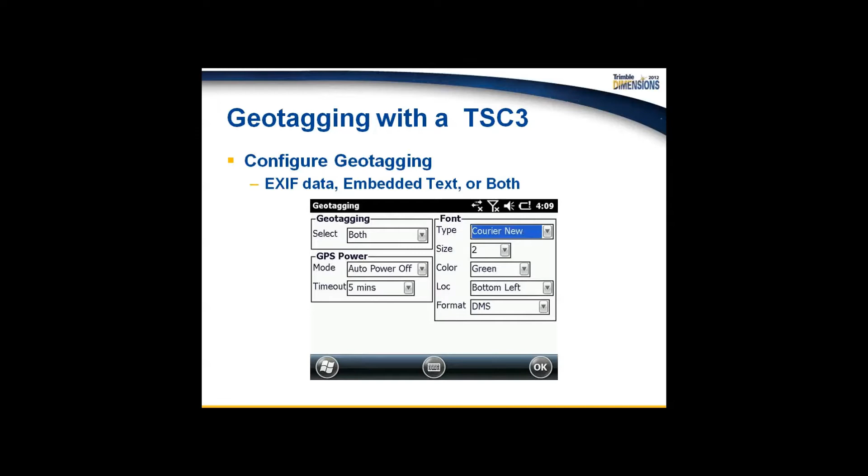We hit that twice to store that image, and now we can choose to do what we want to do with it, much like you saw on the previous screen where we can geotag. We can attach it to a feature based on the setting we have in Trimble Access, whether it's the next available point that we take or the previous point that was shot. And if we geotag, you can see you can put some EXIF data, embedded text, or both with that image as well.

So a couple of things about how these images are stored. As described in the previous slide, you can see the controller can embed the controller position onto that image. However, if you're using Trimble Access and not the embedded geotag function in Windows, you can embed the measured position that was measured with your GPS to that particular image using the geotag function setting within Trimble Access.

So as a review on that, the TSC3 that many people are now running with Trimble Access, you can use that for geotagging, which we already talked about. Obviously, you can use the internal GPS for navigating, and then also if you're using a robotic total station, the integrated GPS search within Trimble Access can be used with the TSC3.

Also, with the introduction of Trimble Access with the TSC3, they introduced this compass. So keep in mind, if you're using a TSC3 with Trimble Access, you can turn on the compass. You'll notice in the upper left window that the compass has been enabled. You can see the north arrow has got a couple of dashes around it to indicate to the user that the north arrow is being generated and displayed using the compass embedded in Trimble Access software.

And the picture on the right, the compass has been disabled. The north arrow is just a standard north arrow. And you can see here on this screen, you can configure that under the Options key in the stakeout menu.

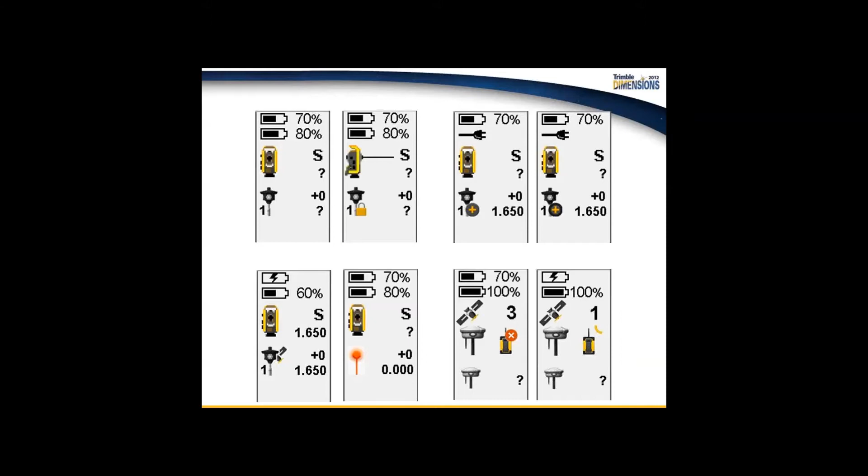Okay, and then in September 2011, Trimble introduced Trimble Access 2011.1. So with that update, they introduced the land seismic option. Most people aren't using this SDK option, but it is an option here. I just wanted to bring up a slide on what it does. Basically, this particular land seismic option allows you to work in a seismic grid stakeout routine. It works within the Trimble Access jobs. It uses the same jobs, but it also allows you to bring in other jobs from GP Seismic software for grid-based navigation, for exclusion zones, for calculating offsets with these TPL files.

So GP Seismic Office has a direct integration with land seismics. So if you're doing any seismic work, that integration is built into Trimble Access with this module. And notice a note here that this land seismic module is an excellent example of how the Trimble SDK works. Certainly look for more SDKs to be introduced in 2013. There will be one introduced from Frontier Precision in January of 2013 on a land surveying geodetic module that you'll see here in the next 30 days or so.

Okay, moving on to 2012, or this past year, Trimble introduced Access version 2012.1. Some of those enhancements were, I would say, pretty major. Panorama was added to the Trimble Vision instruments, so the panorama feature that you have for the Trimble VX was also added for the Trimble S6 with Vision. You'll notice you have this new volumes and surfaces tool. You have the integrated interrupted target measurement, which I'll also talk about, the OmniSTAR, as well as how some of the stakeout display orientations are changed. The reason I'm going into a couple of these, like stakeout display and volumes, is these are things that a lot of you that have attended our user group meetings in the past have asked for.

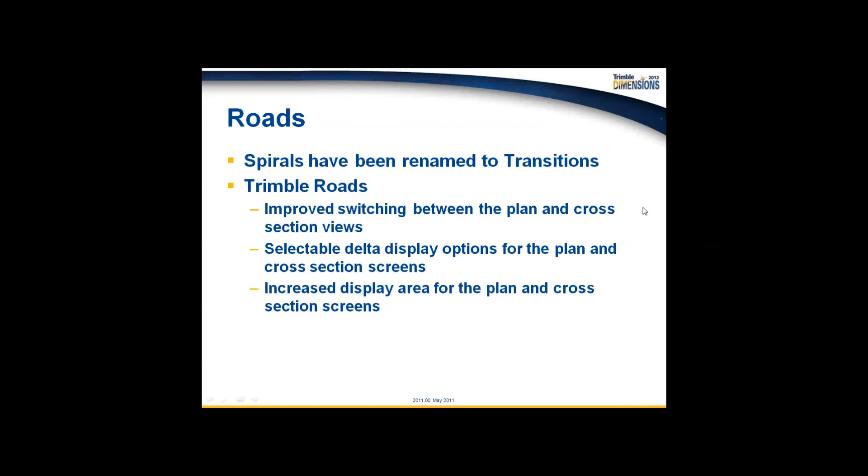So a calculated construction offset now can be applied when you stake a Trimble road by station offset. Previously, this option was only available when you're staking nearest offset, which a lot of people did not use. So now you can use a calculated construction offset. Basically, this means you don't have to change the earlier defined construction offset if you encounter some kind of obstruction and need to move your offset based on that obstruction.

Anybody that's using GENIO Roads, one thing that they did change here is the graphical stakeout selection improvement; the GPS position is now displayed there, so you can see that as you're staking a GENIO road. And then also if you're staking a GENIO road in a conventional survey, the instrument position, backsight, and instrument are now displayed. Construction offsets for the 5D string now appear as well in the stakeout plan and cross-section views.

Here's a big one for Trimble Roads, this is 2012.1 of Trimble Access. Now when you're keying in a template and you want to use that in another road possibly, you can now copy that template from one road to another so you don't have to duplicate that process. This is a huge improvement, something we've had customers asking for a little while. Again, based on what I've seen customers looking for, this is a very big key feature with Trimble Access.

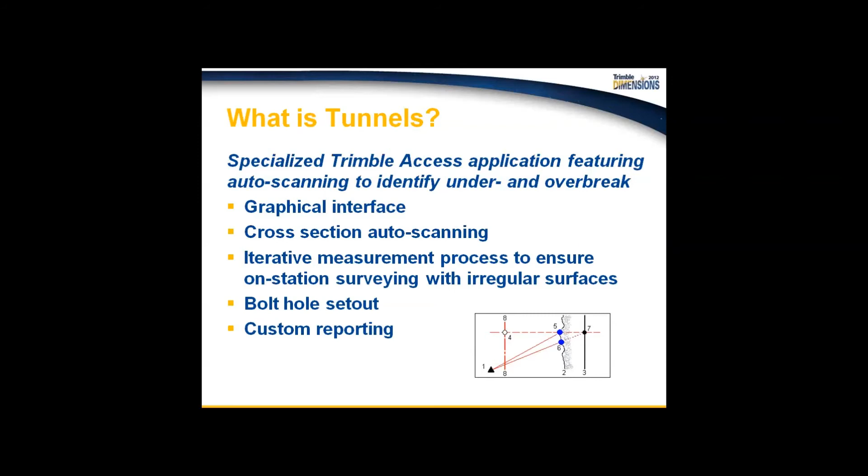All right, moving on to tunnels. What are tunnels? Again, it's a specialized Trimble SDK application featuring an auto scanning feature with a total station and the ability to identify under and over breaks. So you can see here in this image, you've got a graphical interface, a cross-section auto scanning routine with tunneling, a measurement process to ensure on-station surveying with irregular surfaces, as well as bolt hole set out and custom reporting for the tunnel application.

Another SDK is the mining SDK, which is more of an underground mining feature, by the way, not an above ground mining feature. It streamlines your workflow for a drill rig type of development for your drive set out. It allows you to easily select matching pairs of points for your laser lines, your pivot positions, and your blast holes, as well as automated stakeout for center line, grade, and laser lines. And lastly, you can stake out the blast hole collars and your drill rig pivot positions for these underground applications.

Another SDK is monitoring. We've talked about this a little bit with our customers, and some of them are actually using this monitoring application. It's just, again, streamlining from a regular survey into more of a monitoring survey. And some of you actually probably use your regular general survey for some type of monitoring. Well, this actually contains a different file, this MJOB, and this MOBS file, this observation file, which contains station setup, backsight information, and then all your measured observations for more of an automatic or manual pointing type of monitoring.

It'll allow you to see alerts if you're out of tolerance, rather than you take it back to the office and find out later that this monitoring setup was out of tolerance. You can find out right there while you're on the site. And you can do a tolerance test. And then as well, you can get this custom report, which allows you to see graphical scatter plots and any tolerance data in regards to the monitoring prisms or GPS positions that you're measuring.

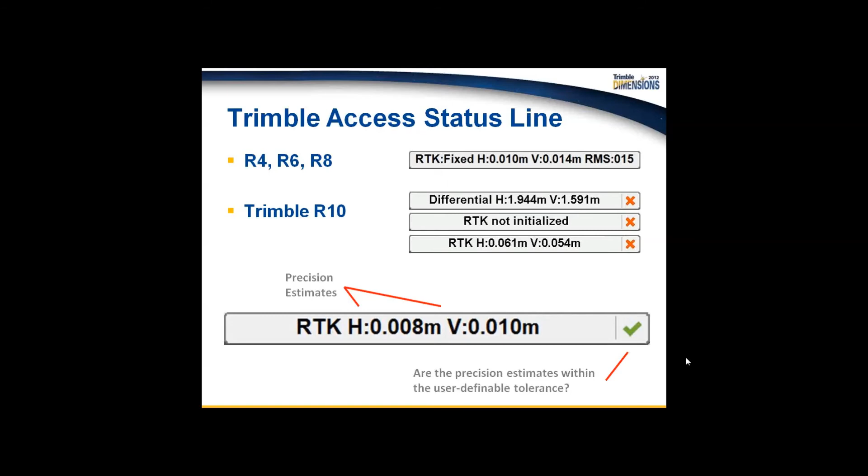A note, by the way, you see at the bottom of this screen, older receivers still use a fixed float mode. Okay, R10 is the only one that does this. So this is what you would see if you're using an R series receiver, R4, R6, R8, 5800. You see a fixed indicator, a precision horizontally and vertically, and RMS. This is what you're going to see with an R10. In this particular case, you're going to see if it's in differential, if the RTK is not initialized, and then you're going to see a precision-based measurement if it's outside of tolerance or inside of tolerance, either with an X, meaning you're outside, or a green checkbox, saying you're within the tolerance that you set. You can start measuring.

Another technology is SurePoint, which allows you to use the tilt sensors on the R10. Those tilt sensors essentially give you measurement automation, increased accuracy with tilt warnings, and a tilt distance that you can review. You can actually map it, report it in TBC, and even graph it in the QC graph, which is pretty cool.

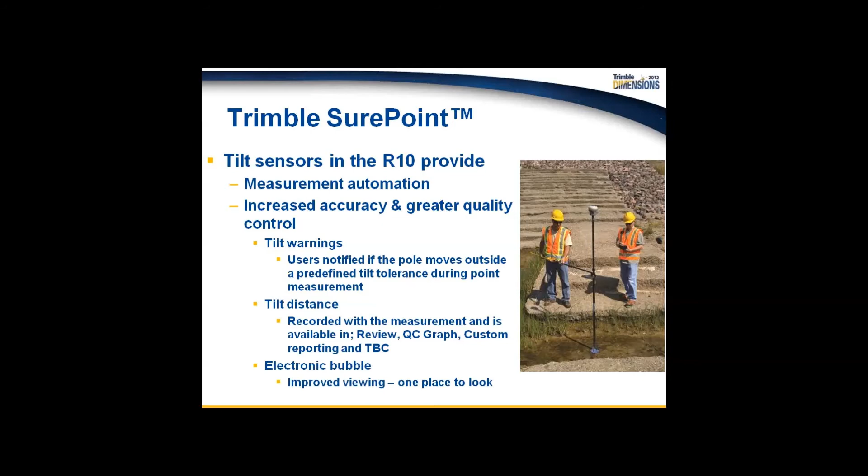And then lastly, this cool little electronic bubble, called the E-bubble, of course. I'll show you that as well. It enables clearer, easier, more accessible measurement views in regards to leveling during measuring. Coupled with the tilt auto measure, the E-bubble allows you to measure points automatically when the pole is within tolerance, and I'll show you a little video of that.

You can see from this image what the electronic bubble would look like. You can see it any time on the TSC3 with the Control L key when using an R10. That'll allow you to show or hide the E-bubble for any screen you're in. You don't even have to be in a measuring screen, you can see it anywhere. Topo and rapid point measurement support this E-bubble, and it's configurable how well or if you want the tilt auto measure to be used, and also the tolerance.

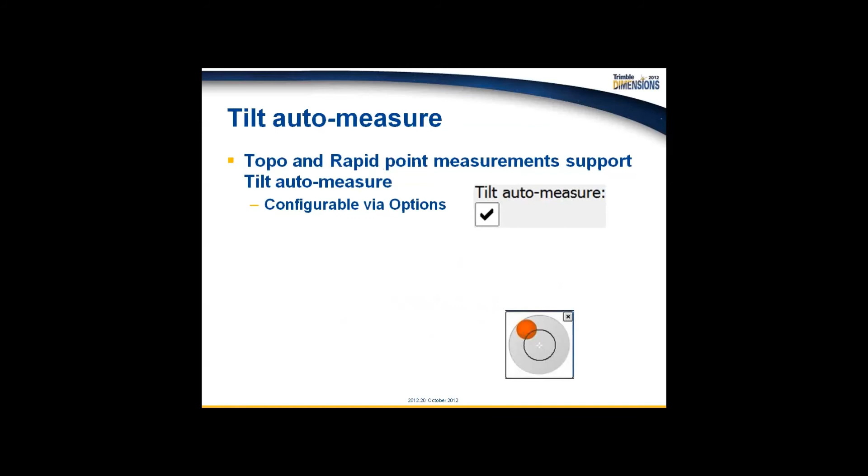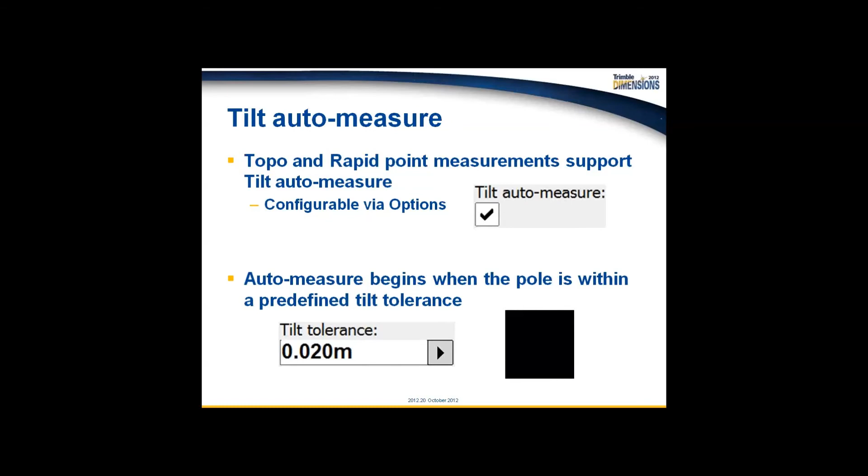Let's go back to that screen here. You'll notice a little video on the bottom. It's just going to show you how that tilt auto bubble kind of works. So you can see that here. As I level up, it goes green. As I go out of level, it goes red. I'll show you a little video of that here in a second, but I'll just leave this screen up for a second or two to show you how it works, basically how to configure it, how to start it.

You basically plumb the pole using the E-bubble. The auto measure starts when the pole is plumb and stable, and the point is stored after 2 epochs have been completed, and you walk to the next point. The pole gets plumbed up again and it starts to measure again. You don't have to hit any button on the screen. All you're doing is looking at your level bubble, which is what a surveyor should be doing.

So you can see you're going to get some status indicators there. It's waiting for you to move to the next point. It's waiting for you to level now that you're at the next point, and now it's measuring. So let's go ahead and take a peek at how that works. Hopefully everybody can see this video okay. You'll notice here's your E-bubble down there.

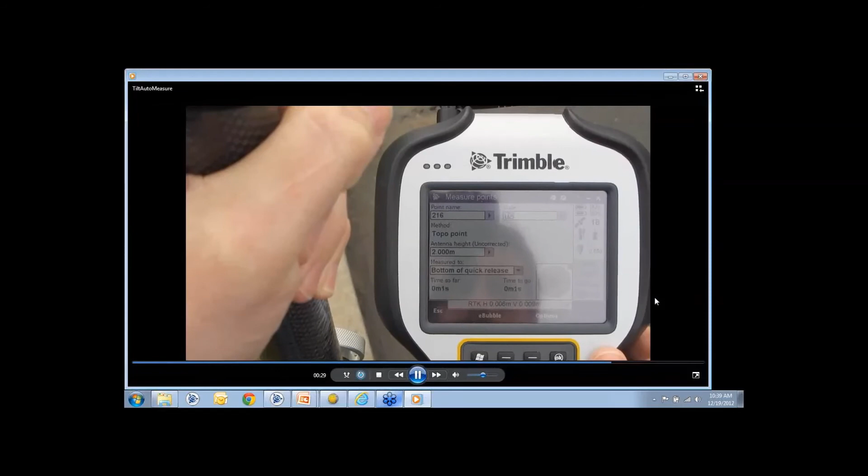All right, so you can set the tilt tolerance on that E-bubble for topo and rapid points, as you can see here. And you can see as you set the tolerance tighter and tighter, the black ring circle will be tighter and tighter around that green bubble.

If you're going to use the e-bubble, first of all I should say it needs to be calibrated from time to time. And when using the e-bubble, you'll notice that it works with the data collector when the receiver's keypad is pointed in the same direction that the controller is facing, much like you see in this particular image here. So you need to have your receiver pointed in this particular orientation.

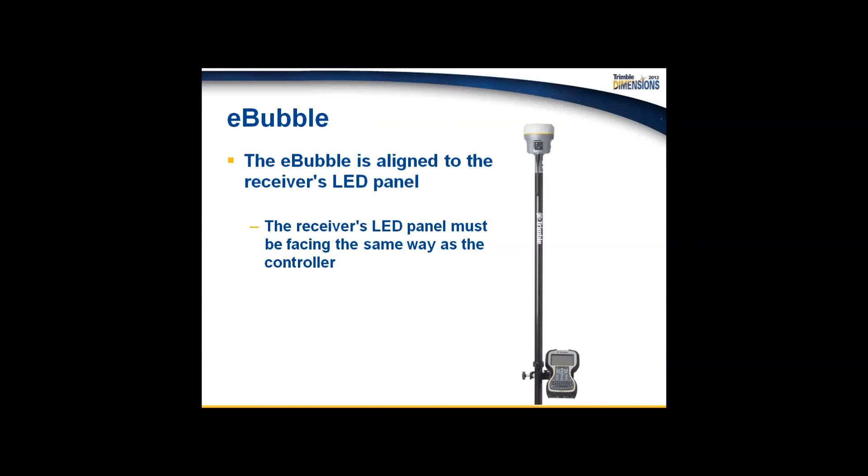And like I said, the e-bubble needs to be calibrated from time to time, and you can do that within the Trimble Access menu. I'll show you a little video of that as well.

All right, so you can see here that the e-bubble—I'm going to go ahead and pause this for a moment. If you notice down here, this is your actual bubble on your rod or your tribrach or whatever you're using. Notice that that is plumb and your electronic bubble is not. So it's a good indicator to you that this needs to be calibrated. The rest of this video is going to show you how quick this calibration process is and how easy it is.

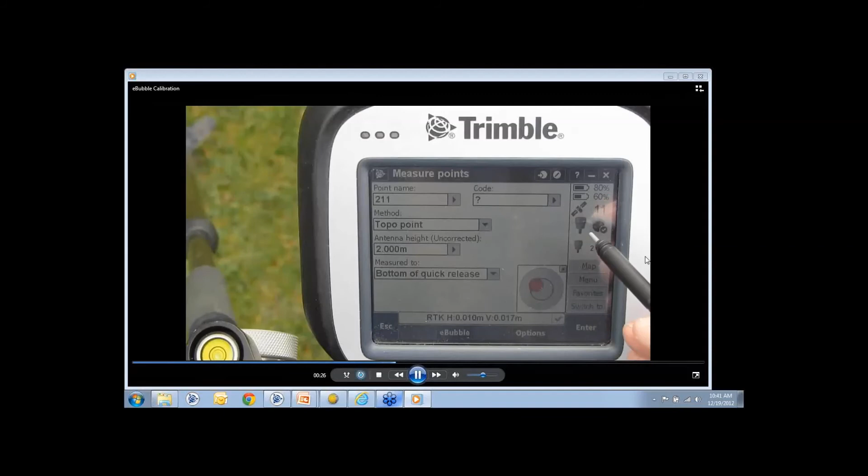You're going to align the instrument receiver keypad with the data collector, much like you see in that picture. You're going to go to the instrument menu by tapping and holding on the receiver icon. If you release after tapping and holding, you'll see an e-bubble soft key. You can go into the soft key and notice there are a couple things here that you can modify.

Maybe I'll back this up briefly. You can see you can modify the sensitivity, the tolerance, the e-bubble configuration here for medium, low, or high. And then you can calibrate, and the calibration is just going to tell you that it's going to calibrate the tilt sensors within the R10.

Make sure the instrument is level and braced, much like you see here with a bipod. Tap OK when you're ready to calibrate. Once you tap OK, the calibration process will start, and I'll let it run. You'll see it'll be 10 seconds or so. It's very, very fast.

You can also have a warning. You can see a calibration age limit of 30 days. You can have a warning to tell you, hey, every 30 days, recalibrate your e-bubble. Now you'll notice it's calibrated. It matches your pole calibration. You're ready to go do your survey.

These tilt warnings are displayed. Note if the pole is outside of a tilt tolerance - in other words, the bubble is red and outside the circle. When starting a measurement, you'll see a tilt warning. Also, when you try to store and it's outside the tolerance, it's going to tell you tilt warning, and you want to accept or remeasure.

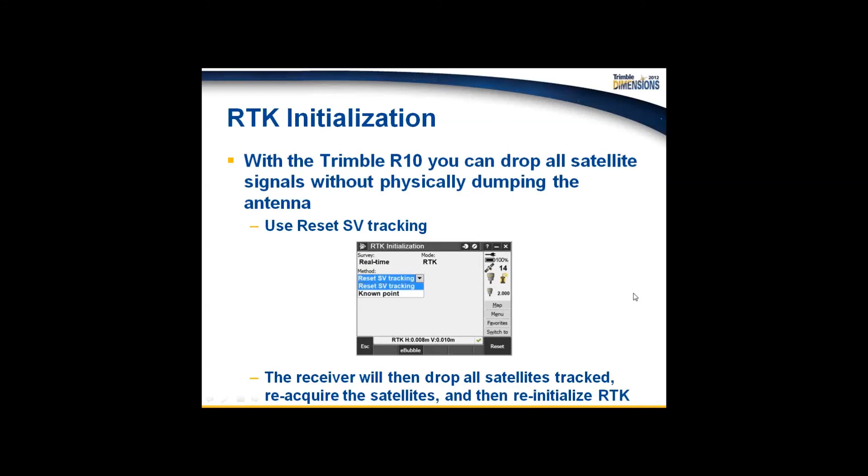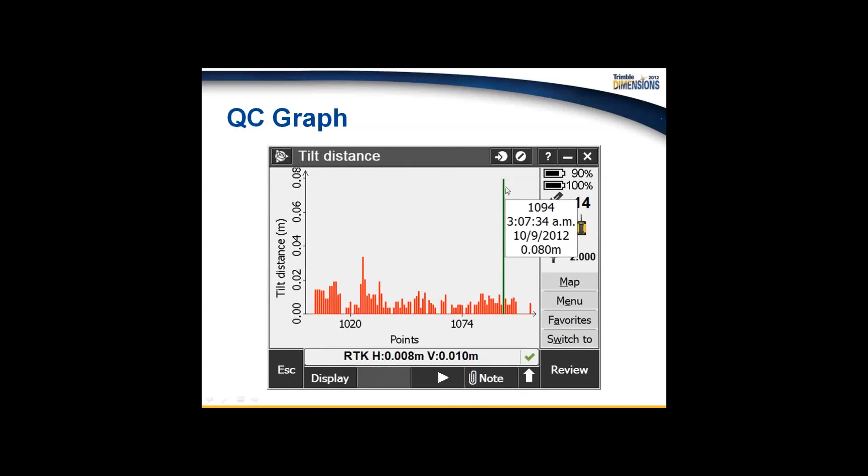And here's a QC graph of the tilt distance. You'll notice all these tilts are within 4 centimeters, and you'll see one that probably was purposely measured that way so that they can show that you can see points that are outside of tolerance.

One other thing in 2012.2, when you're staking out, fine and coarse mode are gone. You won't see that anymore. There's no soft key anymore. The receivers are now set to operate in low latency mode at all times when you're staking out.

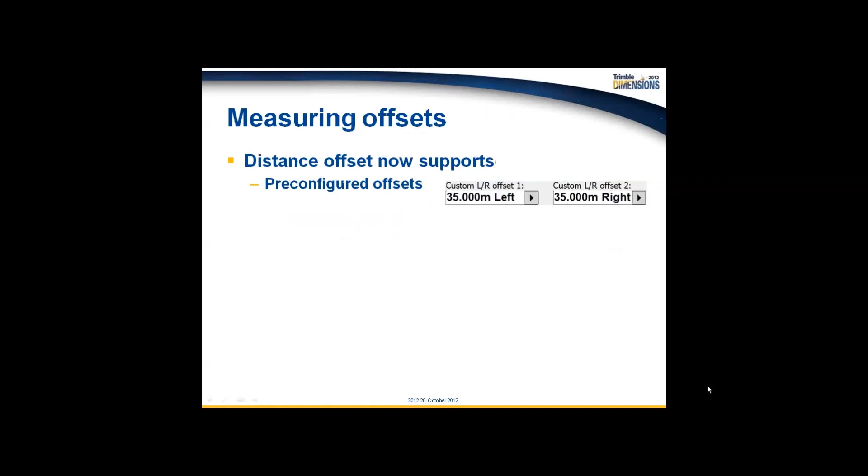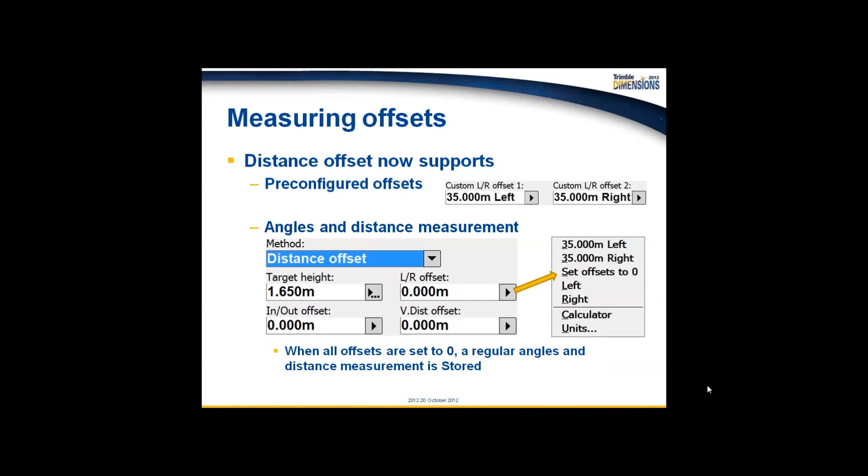Also, when you're doing total station offset measurements, you can set a default offset. In previous versions of Access, there was no default. You can set a default offset so that it can be picked from a menu. If you're doing 5-foot offsets all the time, or in this case 35-meter offsets all the time, it allows you to store a default offset for angle and distance measurements.

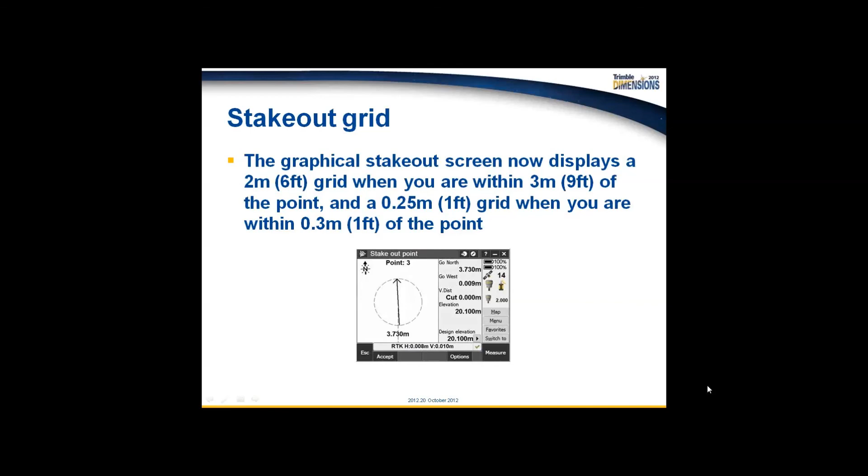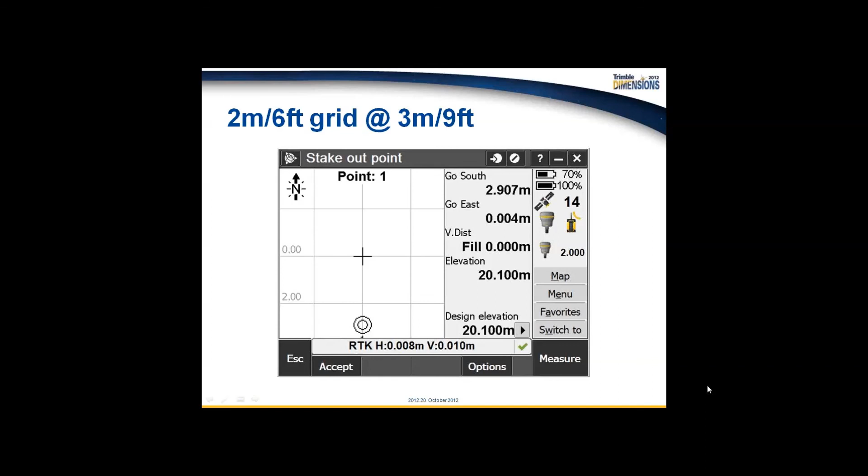You'll notice in 2012.2 you have the graphical stakeout screen, which allows you to display a grid. So in this particular view, there's no grid. You'll notice that there are 2 grids available. There's your no grid, by the way. There's your 2-meter or 6-foot grid, that you see. And as you get closer to your point, there's your basically 1-foot grid.

So it just helps you graphically say, hey, I know I need to move north 8 hundredths, or I should say south 8 hundredths in this case. It's just a lot easier without having to look to the right here and look at your distances and add them up. You can see on the grid, find stakeout points a lot faster.

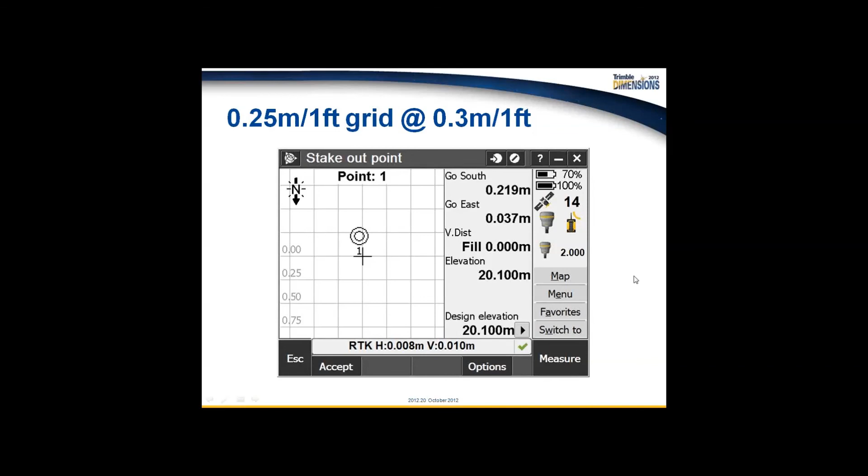You can reverse the line and arc direction in Trimble Access 2012.2. And when staking a line or arc, you can use the station plus or station minus, and you'll notice that in previous versions, if you had a line defined, it would actually take you beyond the line. It would never stop at the end.

Now you have the option to stake the end point of the line, which is something that a lot of you have been asking for. And that's in 2012.2. So you can stake out the end of the line. It'll actually stop you there. And here's a quick example of that.

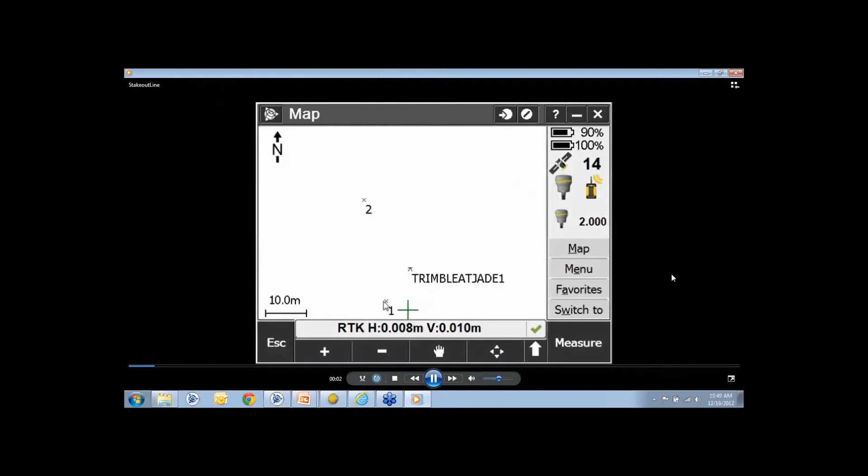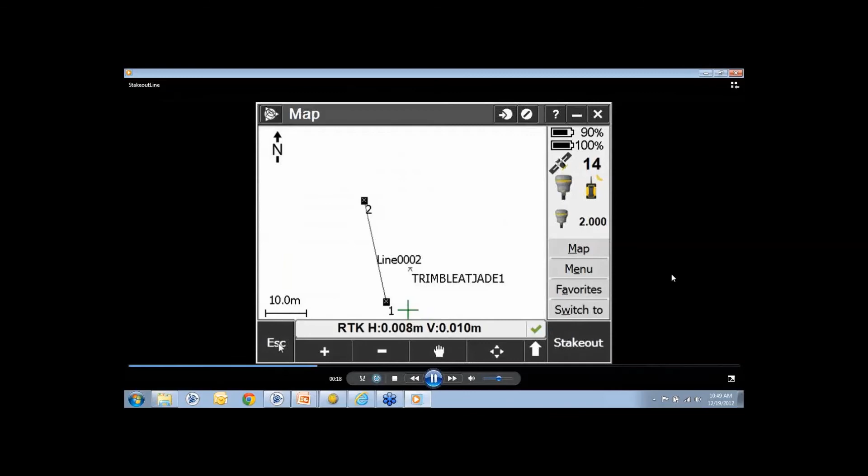So now you're selecting your 2 points and keying in a line. Sorry, the graphic will catch up, it's a little slow. And you can see your line has been defined and stored. Now you can escape back out to the map screen, and you can select your line, right-click or tap and hold, I should say. You can reverse the line. You can also offset the line. Okay, so those are some new functions.

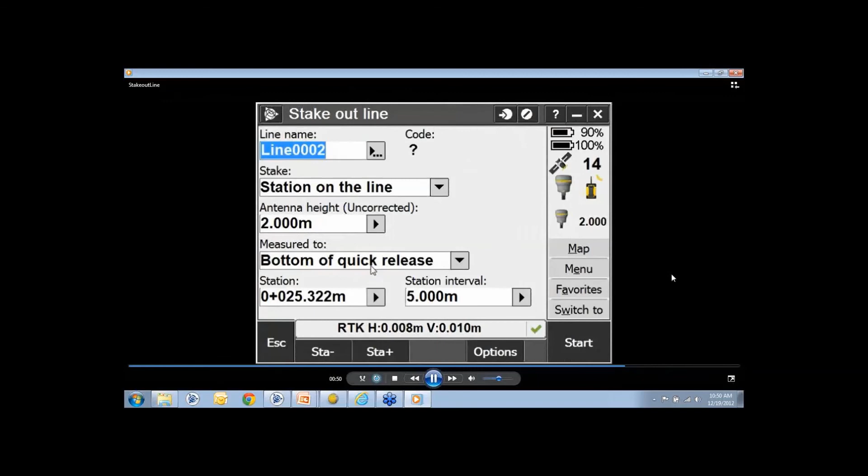Notice now when you go ahead and define your station interval to stake the line, as you're staking the line, you can bump the station up. When it gets to the end of the line, as you'll notice here in a moment, it will ask you, hey, I'm at the end of the line, do you want to stake out the end point of that line? Previous versions would have just kept going. So that is a new function in Trimble Access 2012.2.

New laser lock function allows you to use the laser pointer in the dark to find your prisms a little easier. And a couple other minor improvements: averaging duplicate points are now supported with weighted and unweighted, so now you can average duplicate points as a weighted solution or unweighted solution. The laser rangefinder, Laser Ace 1000, is supported now, and these PNG type of image files are now available as a background map.

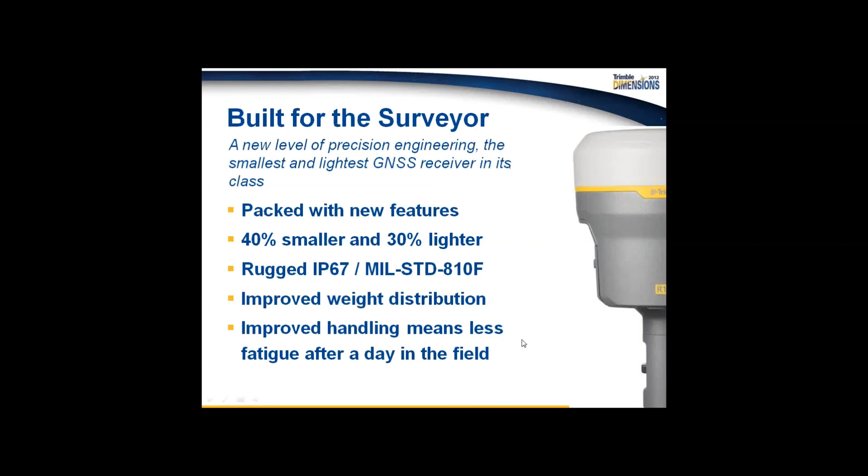Exports for DXF are in every version of Trimble Access 2012.2 as well. And then we did talk about the R10 improvements that we just discussed.